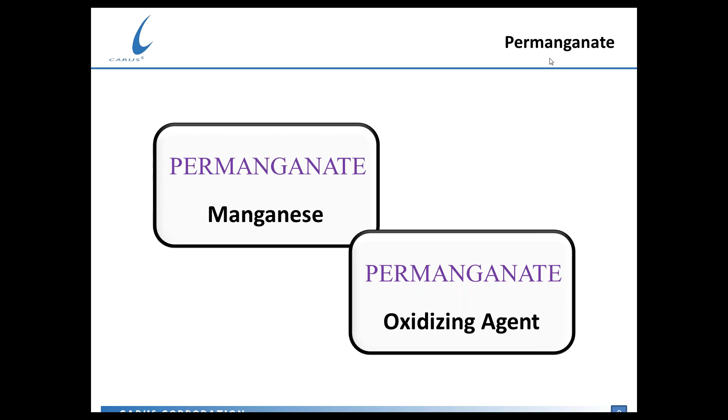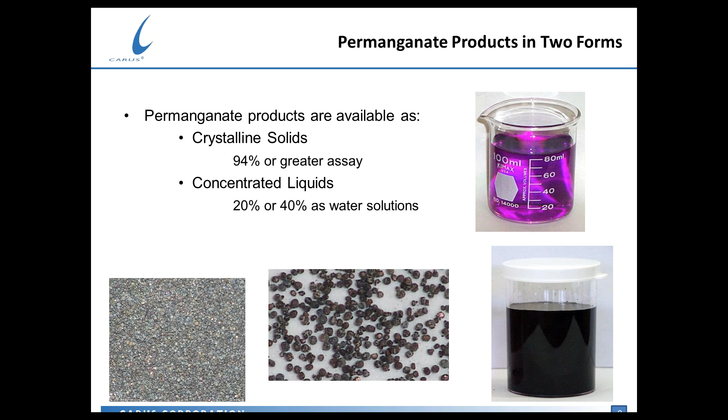So let's start with permanganate chemistry, first of all. Permanganate really falls into two chemistry buckets. It's first of all a manganese compound, and secondly, it is an oxidizing agent. And it comes in two primary forms, either as a crystalline solid of pretty high purity, usually greater than 97 to 98%, and also now as a concentrated liquid. And the liquids are manufactured in either a 20% liquid concentration or a 40%.

The dry crystalline permanganate products are potassium permanganate, and their formula is KMnO4. And the liquid products are made with sodium permanganate, and its formula is NaMnO4. We consider permanganate to be a stable oxidizing agent, which means basically that we can manufacture it, package it, and deliver it in dry crystalline form or as a concentrated liquid, where the user then can take it out of that package and use it on site.

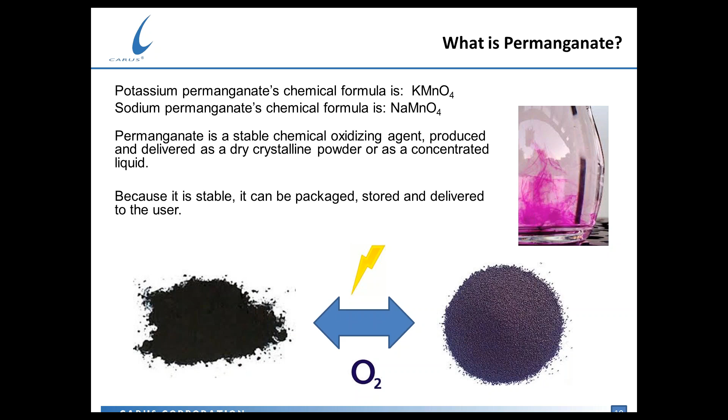It does not have to be generated at the site where it's going to be used. It is stable. It can be packaged, stored, and delivered to the user. What we are doing is we're taking manganese ore, manganese dioxide, and we're applying oxygen and energy to it in order to manufacture permanganate. What the customer does is takes that permanganate and takes the energy and the oxygen back out again and ends up back where we started from with manganese ore.

Now, just a quick comparison between the dry product and the liquid product. And the real bottom line here is that the products are essentially the same, just the form changes. So the active ingredient is the permanganate ion, which is MnO4. The packaging sizes are very, very similar, from small containers to large bulk deliveries. The main difference occurs between the two when we talk about the water solubility.

The dry crystalline potassium permanganate has a limited solubility at room temperature, which is about 6% by weight maximum. Now that's a little bit difficult to achieve except with very good mixing and very pure water. So generally in the field, when the customer is using the product and they want to mix up a solution with dry crystalline permanganate, we recommend that they stay within the 1 to 3% by weight range. It's easy to dissolve the product to meet this range, and it's easy to handle.

And as I mentioned earlier, the liquid sodium permanganate products have a much higher water solubility at room temperature. We can actually manufacture them to be 50% by weight, and then we dilute them for the customer to either 20% or 40%.

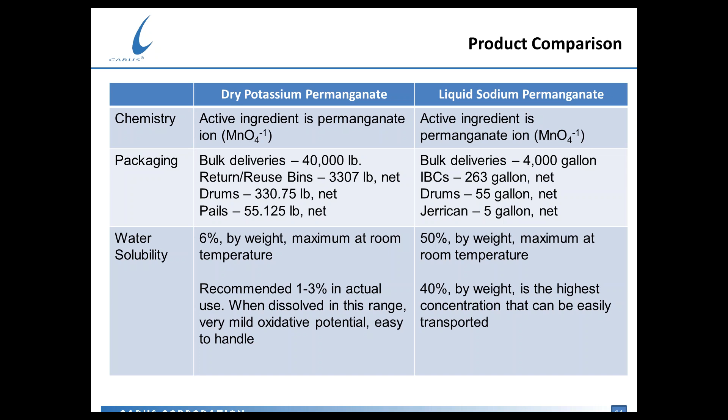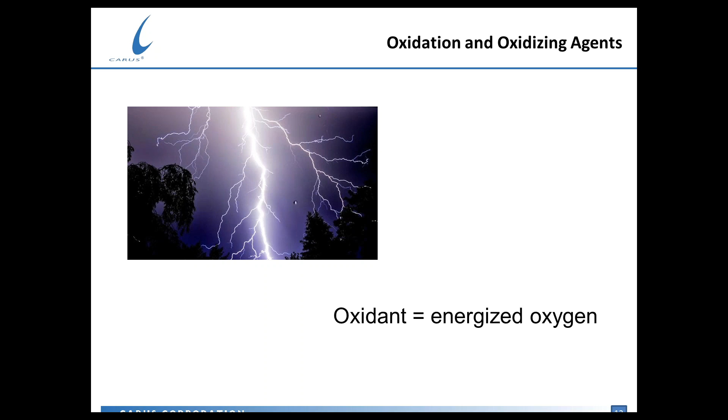So what is an oxidizing agent? In very simple terms, I think the easiest way to describe it is that it's energized oxygen. And in that form, we can use it in a variety of different purification types of applications. Now, oxidation chemistry is very versatile. It's used in a lot of different applications and industries. And for those of you who like to pull a chemistry text off the shelf and read through it, what you'll generally find is that the research work with oxidizing agents involves building something or synthesizing some type of organic molecule. So almost all of what's written in textbooks is about making something else.

In the environmental markets, such as what we're talking about today, we're really talking about the other side of that equation, which is to take unwanted or impure contaminants and break them down into something that is non-toxic or non-odorous or easy to dispose of.

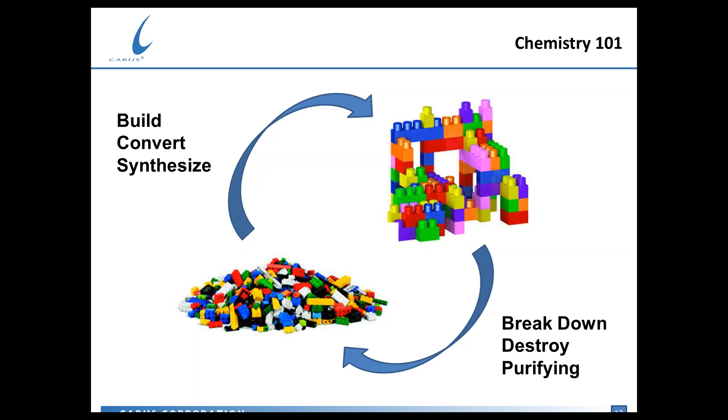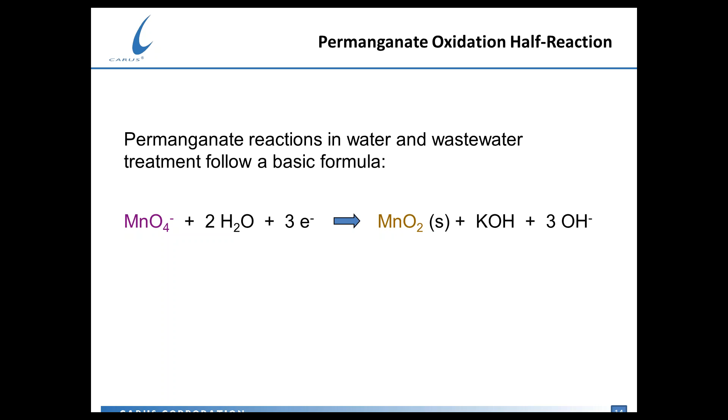Permanganate has a long history of being used for odor control, and that's in part because it is very good at oxidizing specific functional groups on organic molecules. It really likes to attack double bonds and triple bonds in organic molecules, so alkenes and alkynes go very, very quickly. But then there are a lot of side chain types of reactions that can occur as well, with alcohols, organic sulfur compounds, and organic nitrogen compounds as well. By attacking those functional groups, we can deodorize the molecule and get rid of any kind of unpleasant odors that are associated with it.

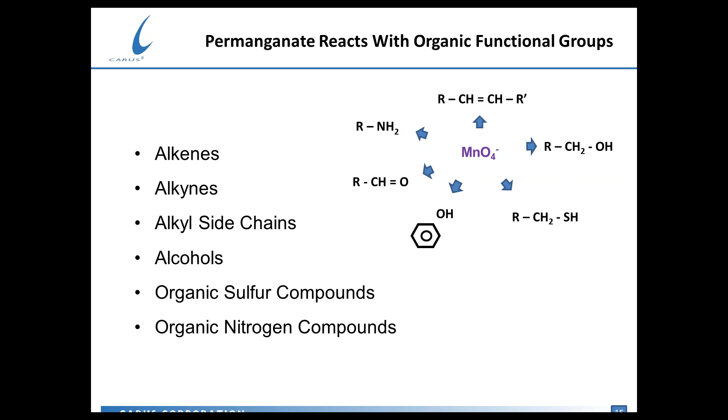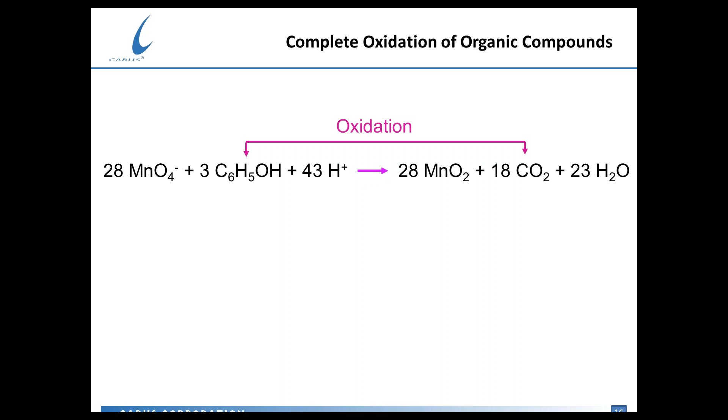Now I want to say a little bit more about the oxidation of organics with different types of compounds. So in an ideal world, oxidation chemistry really involves taking organic molecules and breaking them all the way down to carbon dioxide and water. This takes a lot of energy. Sometimes it can involve heat, such as in an incineration process. But in the mild conditions of water treatment and wastewater treatment, this generally does not occur. What you usually find is that large organic molecules are attacked by the oxidizing agent and split and broken into fragments or small partial organic molecules, usually in the form of an organic acid molecule.

Now this is great if we're trying to remove toxicity or remove odor, because a lot of these byproduct molecules are non-odorous and non-toxic. However, they still are measurable as organic carbon. So if we're trying to remove total organic carbon or BOD or COD, you see very little change in those types of measurements when you're using oxidation chemistry under the mild conditions of water and wastewater treatment.

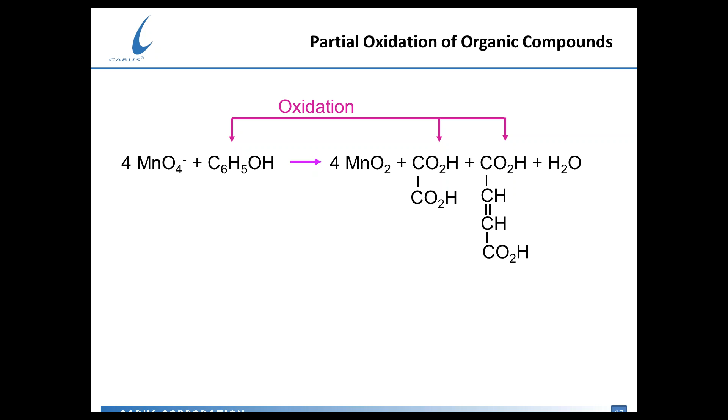Now there are some very specific organic compounds that can be attacked readily by oxidizing agents, and phenol is one of those. And in the case of landfill leachate, sometimes phenol is present in the wastewater as well. So permanganate, along with other oxidizing agents, does a great job of attacking and breaking down phenol into short-chain organic acids.

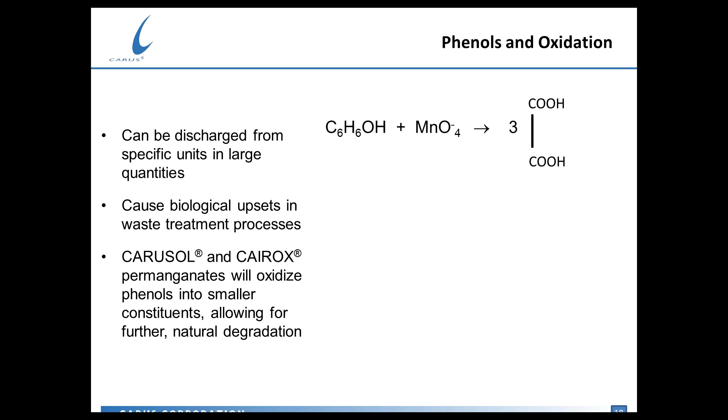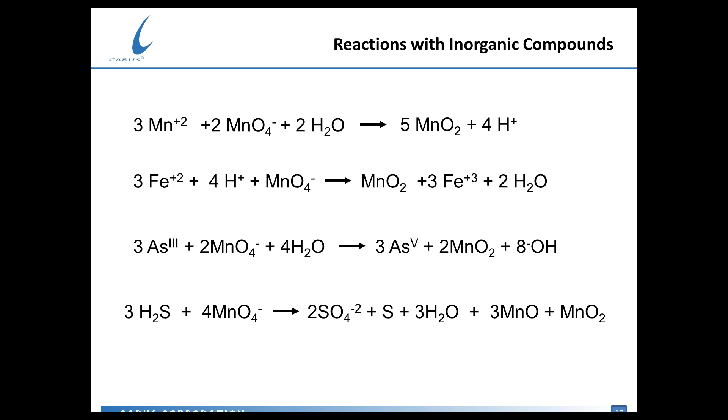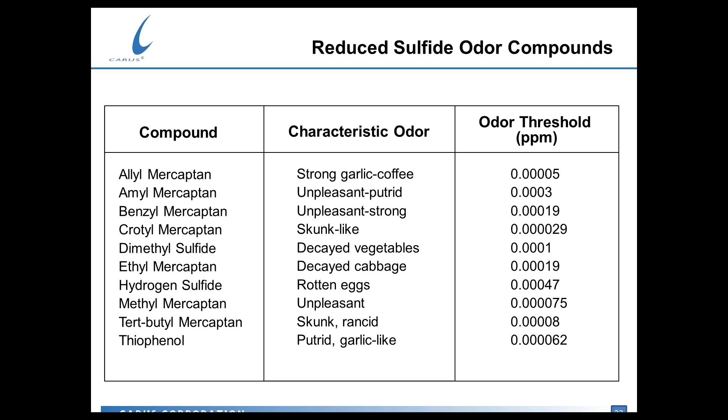Odors are a problem in part because our nose is very sensitive to them and can pick them up at very, very low threshold concentrations. In wastewater treatment, the ones that we run into most often are the organic sulfur compounds, which are called mercaptans, and of course hydrogen sulfide is on this list as well. The real important information on this slide is to show you that the odor thresholds are very low when measured in parts per million levels.

Sulfide is water soluble, and in high concentrations, it can be extremely toxic. Hydrogen sulfide will also dissolve in water on pipes and on metal equipment, and with some biological action taking place, we can form sulfuric acid from that sulfide, and it is very corrosive to different metal parts and to electrical components as well. And in extremely high concentrations, hydrogen sulfide gas can be an explosive.

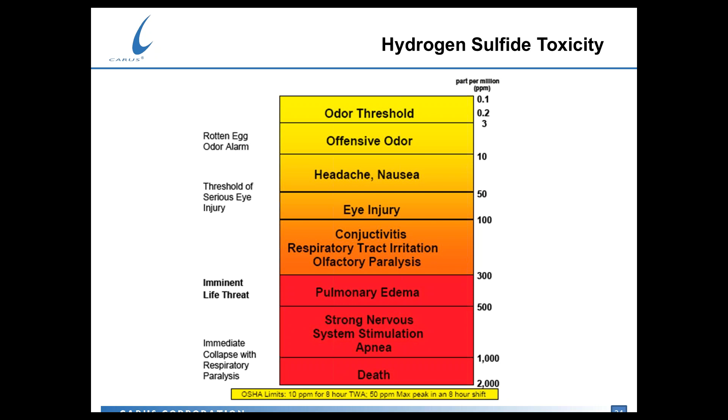This is a very common chart that you can find in a lot of reference materials that sort of warn you about the dangers of inhaling hydrogen sulfide and associated toxicity with it. The very right-hand column of this chart shows you the parts per million levels of hydrogen sulfide in air. And you can see that even in very low concentrations of 10, 50, 100 parts per million, which are not uncommon in wastewater treatment plant operations, you can have some rather negative impacts on human health.

Now, a little bit about testing for and trying to recognize hydrogen sulfide, and how do we do it in the field when we're trying to run a test or determine the effectiveness of permanganate. First of all, dissolved hydrogen sulfide in water can be measured using what is referred to as the methylene blue test. It's a colorimetric test, so what you're looking for is increased blue color as the concentration of sulfide increases in the wastewater. This is a great test. The one that we like using is manufactured by a company called Chemetrics.

And the only real downside to this is if the wastewater is highly colored, it's very difficult to use a colorimetric test to determine different types of concentrations. Now, when we're talking about landfill leachate, unfortunately, we're often talking about wastewater that is in fact highly colored. So this test may not be very valuable in these particular types of situations.

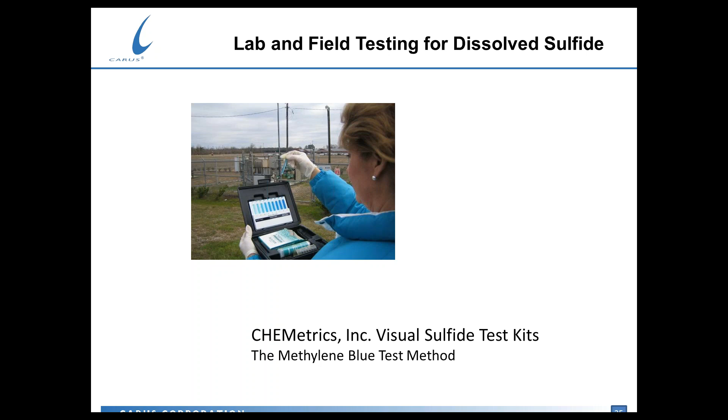A much cleaner test, and one that is extremely accurate, is to measure the sulfide that's being released into the air. So we're measuring volatile sulfide concentrations in air using some type of monitoring device, and the one that we use most often is one manufactured and referred to as the OdaLog. This is a gas monitoring device that not only gives us an instantaneous readout of hydrogen sulfide levels in air, but it can also be used as a data logging device so that we can measure sulfide concentrations over many hours or many days. And you'll see some data later that I'll present that was collected using a gas data logger.

Now, we also use this OdaLog in the laboratory when we're trying to do just simple bench scale testing to determine permanganate demands and permanganate effectiveness. The way we do that is we use very simple equipment. We use a 1 liter plastic container, a jar that has a lid associated with it, and we fill it about halfway with the wastewater that we're trying to treat. So we've put 500 mils of wastewater into it. This allows us to cap this jar and then shake it. And after shaking it for a short period of time, which releases the sulfide into the headspace of the jar, we can take the cap off and place the OdaLog data analyzer on the top of that jar and actually measure and see how much sulfide has been released.

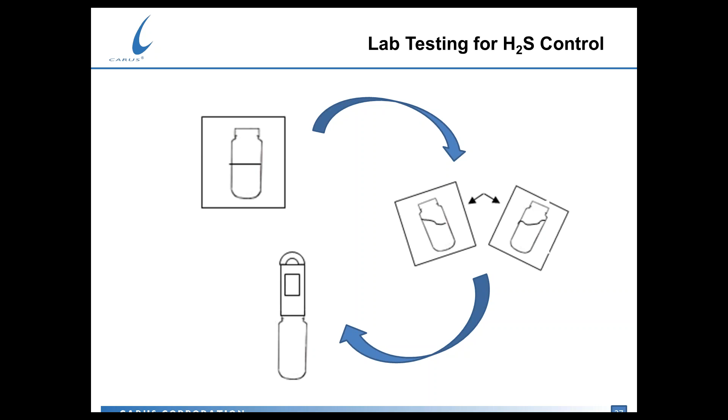By running this test in several iterations, where we have treated the wastewater with different amounts of permanganate, we can see that the sulfides are removed, and we can determine to some degree how much permanganate is required to do that. I would say, however, as a cautionary note, that this is a very concentrated headspace, a very small sample that we're measuring. So we get very, very high sulfide levels coming off in this jar. And as a result, it tends to overstate how much oxidant is needed to remove the sulfide down to a low level. So this is a good screening device, but the actual dosages we may have to feed in the field are best determined by actually doing a field study.

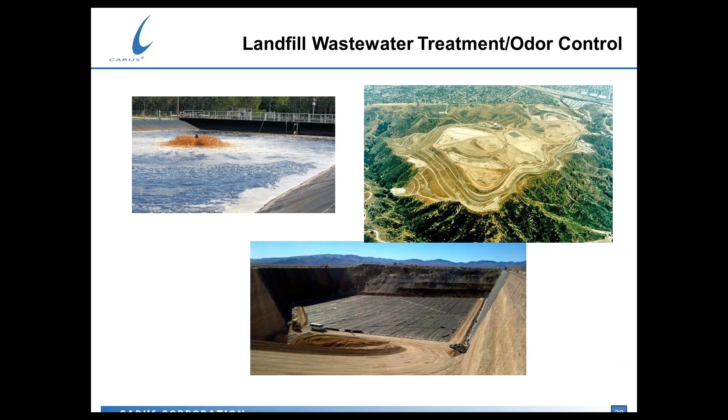So I'm going to move on and talk now specifically about landfill leachate and odor control associated with that particular waste stream. So the industry itself recognizes that there are a lot of treatment challenges associated with treating leachate, and this actually applies a lot to odor control as well. So I thought I would present those just as background. First, of course, there are variable loads and flows depending on how much rainfall is occurring in the area of a landfill operation. So it can be high flows during rainy season and very low flows during drought seasons. So flow equalization and long retention times can contribute to odor production.

Why? Because in a lot of cases, we're collecting wastewater for a significant period of time before it's pumped off site. And during those long retention times, anaerobic conditions can occur and sulfides will be produced by sulfate-reducing bacteria. So the treatment process is often intermittent pumping, and that's not a particular problem except that we should recognize that any type of feed system that we're going to be using should be tied in with those leachate pumps so that we treat only when leachate is flowing. And then in some cases, we can see elevated temperatures in collected leachate, and that contributes as well to odor generation.

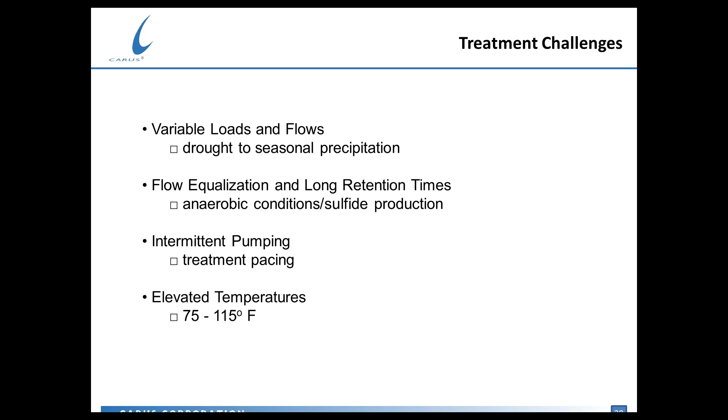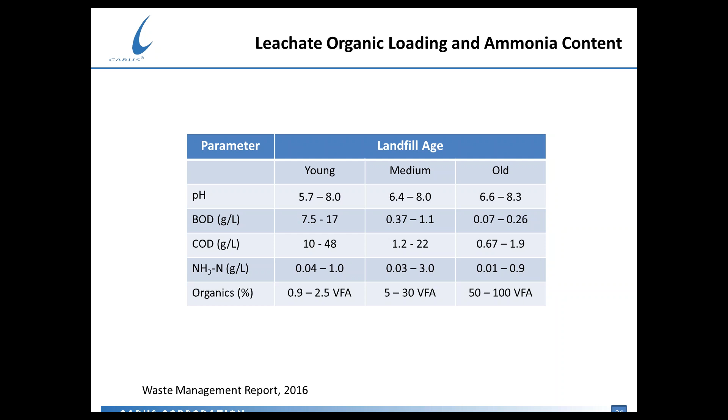In a report last year, Waste Management characterized leachate in this particular way, looking at the organic content and also the ammonia content, which are probably important when you're concerned about pre-treatment discharge regulations or NPDES permitting regulations. You'll be very focused on these types of parameters. One of the things, though, that is interesting about this data is that as the landfill ages, the contaminant loading changes pretty dramatically. So the types of problems that may occur will often be associated with the age of that particular landfill. They also reported not only on organic contamination, but inorganic contamination as well. And you can see that there are a lot of metals and other inorganic compounds that can be leached from solid waste and end up in the wastewater flow itself.

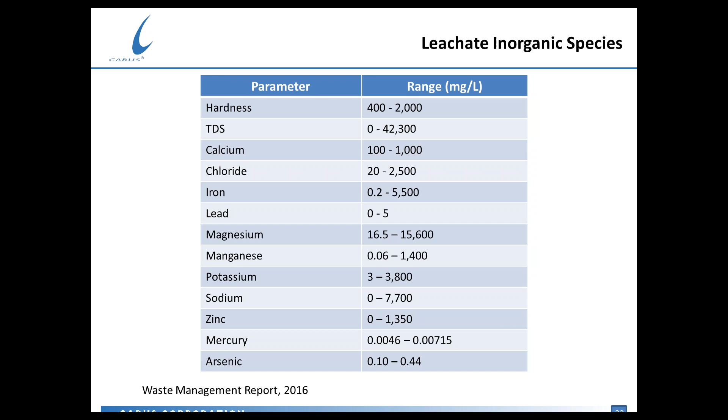Of interest to us here, of course, is that it's quite common to see iron and manganese in these particular systems as the leachate is collected. So I'm going to switch over now and talk a little bit about some very specific cases that we've had the chance to work with.

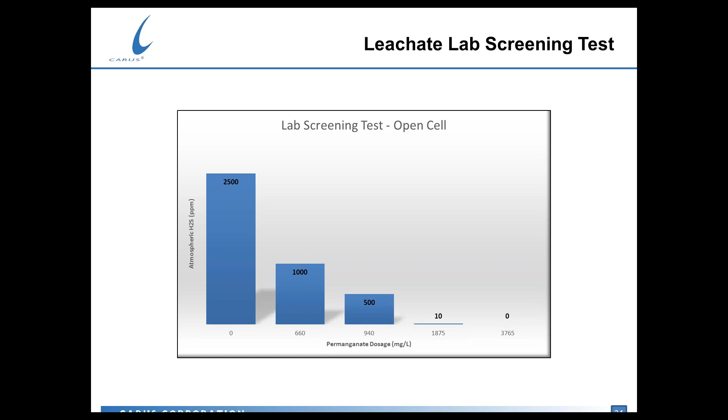I'll back up and say that in this particular case, we did treat the 55,000 gallon storage tank in order to oxidize the sulfides before we pumped and filled the delivery truck. The sulfides were gone then, and the tanker truck, when it discharged in the city, did not have any odor associated with it anymore.

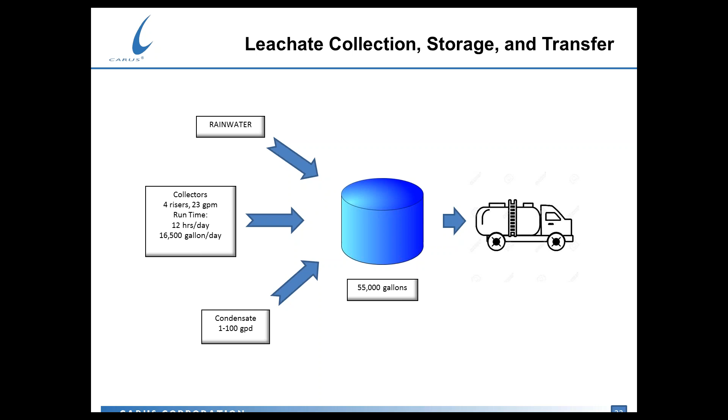So here's another case study that was very similar to the previous one, except in this case, we're talking about a landfill site that was actually located up in Canada. 34,000 gallons of leachate was collected in 3 on-site storage tanks, and it was hauled away using a tanker truck to a nearby municipal water reclamation facility. And as in the last case, the same situation occurs here. Odors are released when the leachate is pumped and transferred.

And in particular, hydrogen sulfide was being released when the leachate was transferred from the tankers to the city or municipal wastewater treatment facility. And at that site, atmospheric sulfide concentrations as high as 100 parts per million were measured, which creates a safety hazard for the driver who's discharging the leachate, but also, of course, a nuisance odor situation as well. So the solution was to add CARUSOL liquid permanganate directly to the leachate, and you can see the results that were

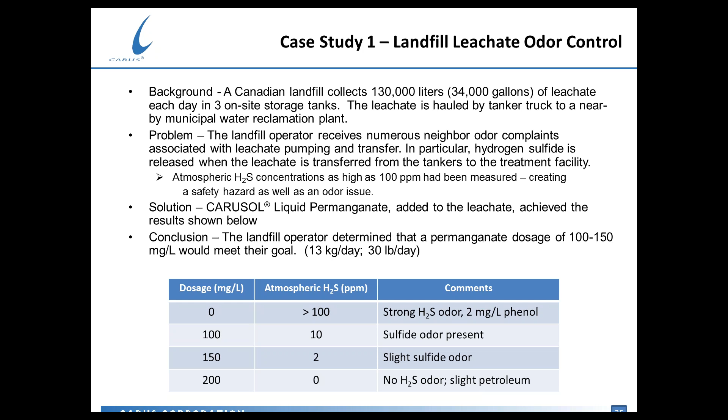generated below. So starting with no treatment at all and greater than 100 parts per million of hydrogen sulfide, you can see that as we increased the amount of permanganate fed, the sulfide residual dropped quite dramatically. So somewhere in the range of 100 to 150 parts per million of permanganate, we're getting the sulfide levels down to a low enough concentration that it's quite possible that at the discharge point where the tanker truck is unloading, there was no nuisance odor situation anymore.

In a recent treatment study that we ran, we have a little bit more information and a little bit more interesting look at what was going on. So in this particular case, a landfill was operating with one open cell and 3 closed cells at their particular site. And of importance in this case, they accepted construction and demolition waste into their open cell. Now, construction waste is important because it often includes drywall or wallboard that was manufactured using gypsum as the solid cement material, and gypsum is calcium sulfate.

So under anaerobic conditions, that sulfate can be reduced by anaerobic bacteria, and sulfide is the byproduct of that reaction. And you can see the reaction that I've put on this slide, showing sulfate in the presence of organic material, which supports the bacteriological activity, and anaerobic conditions. So there's no oxygen present in the system anymore after holding the leachate for some time. The bacteria reduces that sulfate to produce sulfide in solution, and eventually, based on the pH of the wastewater, hydrogen sulfide that can be released into the air.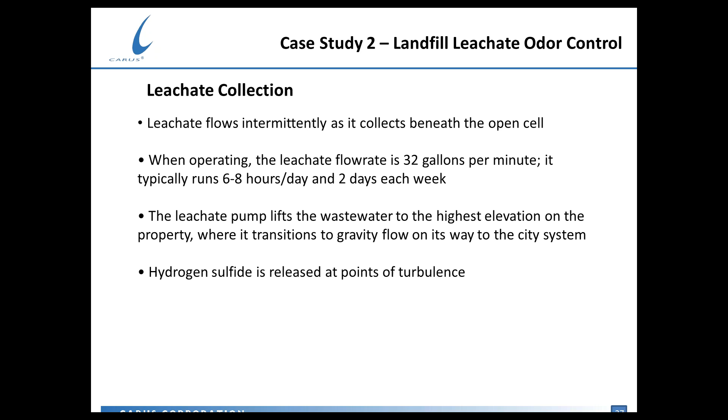And hydrogen sulfide, of course, is released at points of turbulence within this piping system. So certainly at the force main discharge point, and also any bends or turns in the gravity portion of the system will also create turbulence, releasing the hydrogen sulfide.

Now there were several treatments that had been tried, including hypochlorite bleach used as an oxidizing agent, as well as hydrogen peroxide in an attempt to control the odors. But the addition rates were quite high for both of these compounds, and the odor control was really rather a mixed bag. And when hydrogen peroxide was fed, what we've been told is untreated sulfide emissions were running about 1,300 ppm as atmospheric H2S, measured in the first and second manholes downstream of the pump station. Now it could have been that the hydrogen sulfide was actually higher than 1,300 parts per million, but that was as high as the analyzer could read, so we know that it was at least that high, if not quite higher.

Now the operator has told us about the leachate flow with treatment with hydrogen peroxide, and they were using 35% hydrogen peroxide in this case. The peroxide usage was about 18 gallons or almost 59 pounds of peroxide per hour, which was a dosage of about 3,600 milligrams per liter. But at many times, the sulfide levels in the atmosphere still continued to run at greater than 1,000 parts per million.

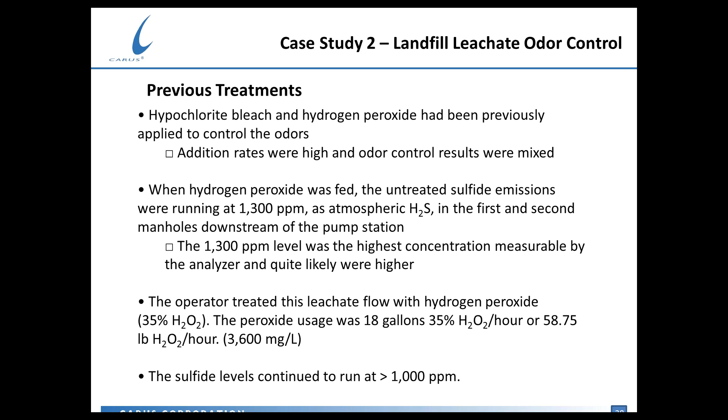Now, to visualize this system a little bit better, I've put together a very simple diagram that shows the wet well beneath the open cell and the leachate lift pump. But of particular importance on this diagram is the junction box where the force main discharges, which is also used as the chemical addition point. And then from the junction box, the wastewater flows by gravity only a short distance, really less than 100 yards, to a gravity system manhole. And the nice thing about this is it allowed a perfect location for monitoring sulfides, either if it was untreated or if some chemical addition was being added to the junction box.

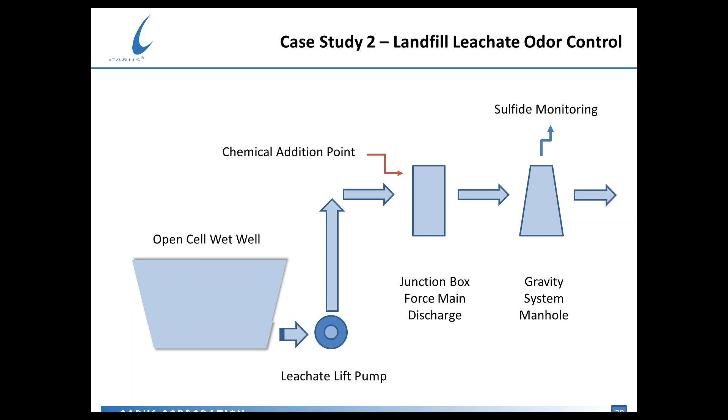And here's an actual photograph of that particular manhole. On the left, you can see the OdaLog analyzer that we're going to suspend in the headspace of the manhole. And then on the right, you can see the cover that is closed and the cord that is running and tied off on the electrical box supports. And that's what's holding the OdaLog in the headspace of this particular manhole.

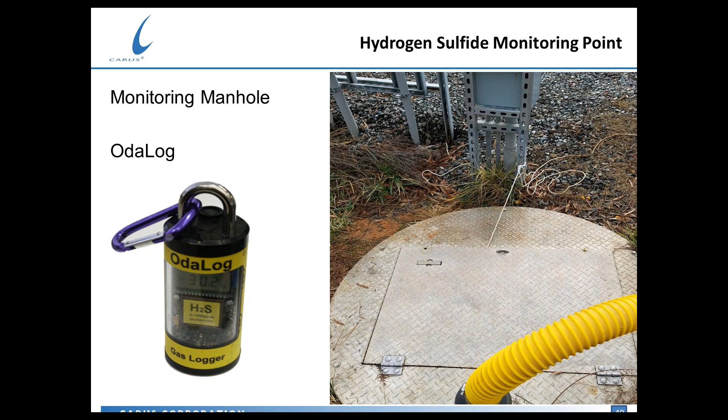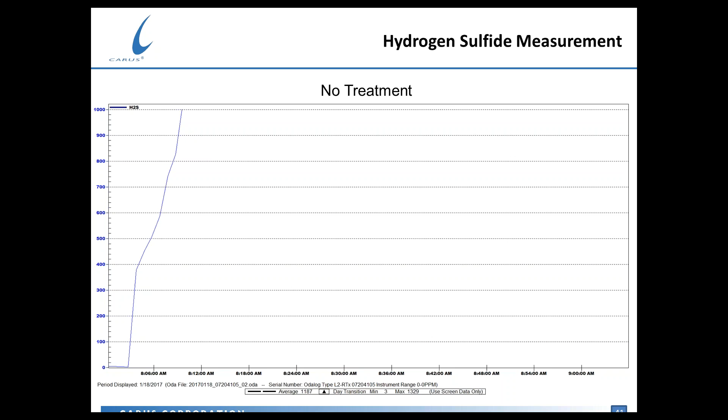So with the OdaLog logger that we put in there, we first tried to monitor and measure sulfide levels without any type of treatment at all. And you can see almost within seconds the hydrogen sulfide level exceeded 1,000 parts per million. In this particular case, we were using an OdaLog that only measured within a 0 to 1,000 part per million range. So we could not tell how much higher than 1,000 parts this was actually running on this particular day. And I can tell you, just as an aside, we destroyed that hydrogen sulfide analyzer by exposing it to those sorts of concentrations.

Now, when we wanted to do our treatment, we brought in a very simple portable feed system. So the liquid permanganate was delivered in an IBC or tote container. And then we used a small LMI metering pump that operated at, I think, a maximum of 8 gallons per hour for this particular treatment system. And during the initial shakedown of the system, we were running in the 2 to 5 gallon per hour dosing range.

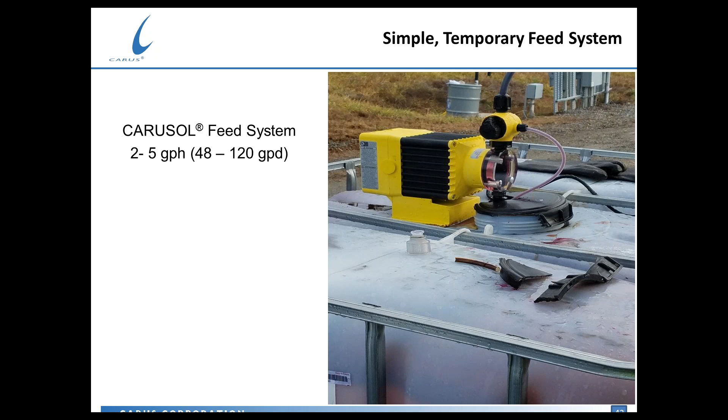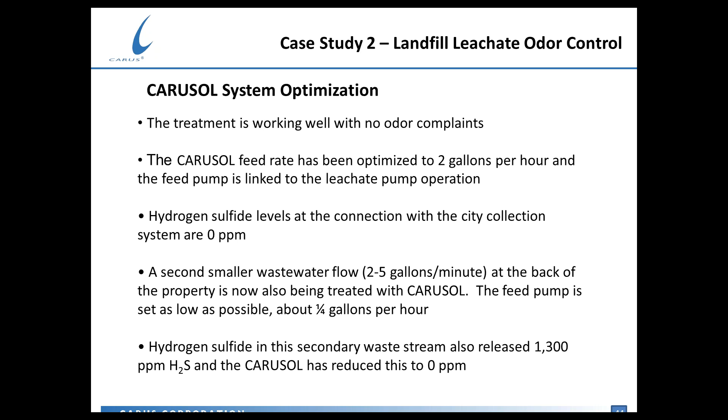They also report that there was a secondary, smaller wastewater flow that only operates at 2 to 5 gallons per minute on the backside of the property. That's also being treated now with CARUSOL liquid permanganate, and the feed pump is set as low as they possibly can set it, which is 1/4 gallon per hour. And they report to us that the secondary waste stream also can release very high levels of sulfides at various times as well. So the CARUSOL is reducing more than 1,000 parts per million of sulfide basically down to 0.